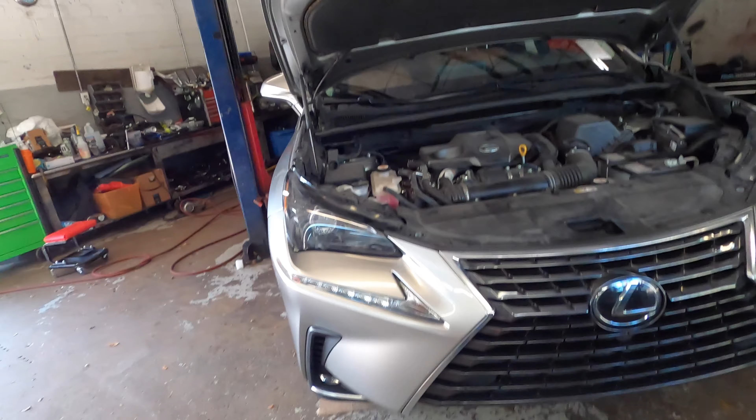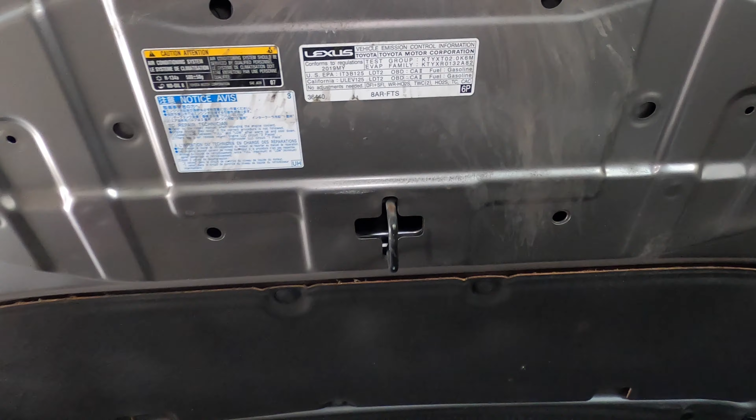So today we're gonna go ahead and change our oil on this Lexus NX 300. Not NXX, it's NX 300. So if your Lexus looks like this, it's gonna be the same procedure if you come with the 2.0 liter engine. Even if it's not the NX, I think the IS 300 comes with it. The one that comes with the 2.0 is the same exact engine, same setup. So it's a turbo car, 2.0 turbo.

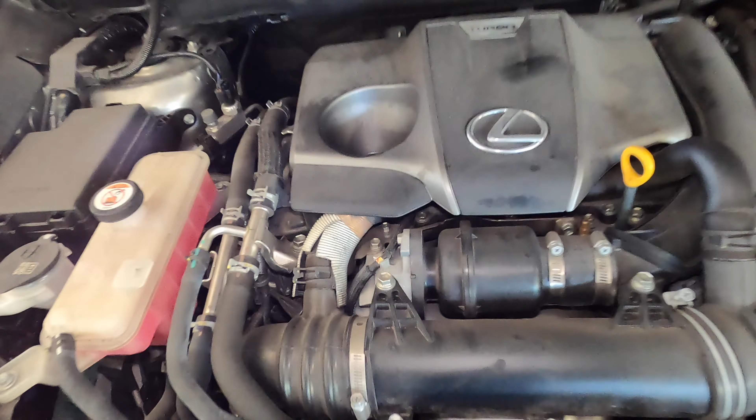So we're going to go ahead and replace the oil and reset the oil light too. So this video will be about that, and let's get started.

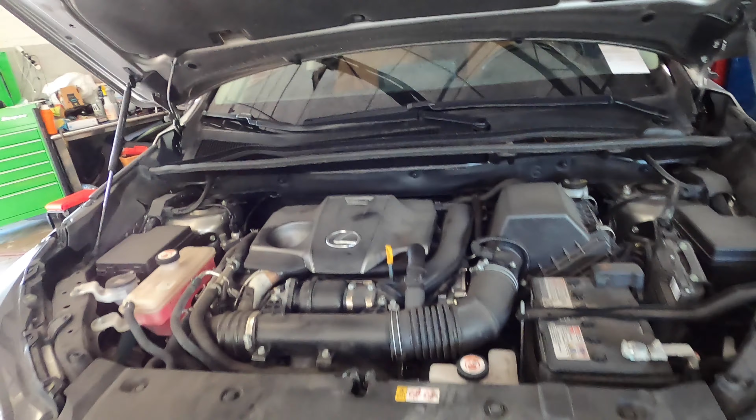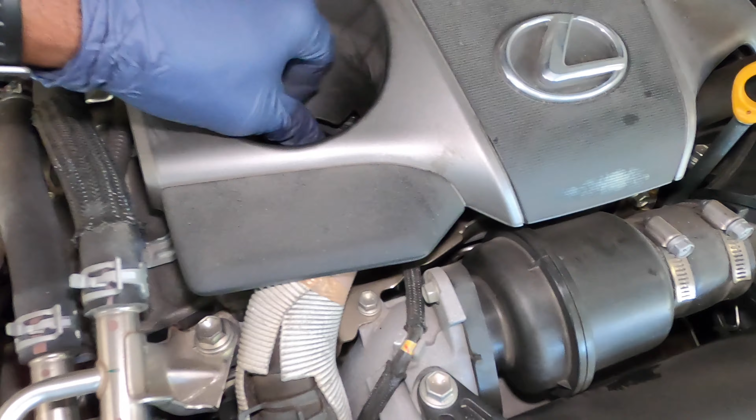So we're going to go ahead and take the cap off. And the reason why we take the cap off is just a personal preference. You don't have to do it. And also you can see it takes 0W20. So I'm gonna leave the cap off. The reason why I take it off is just to have the oil flow out in a steady stream and not all over the place or creating a mess. So that's why I take it off.

That said, we're gonna go ahead and lift up the vehicle and go underneath the vehicle. So guys, now that we're underneath the car, we search for the oil filter. It's going to be right here by your passenger front tire. Your oil filter is right here, and you're going to need a special oil filter tool, the one you use to work on the Toyota.

So if you never knew, Toyota makes Lexus, so it's the same kind of design where the oil filter comes in. And this is the drain plug right here. So I'm gonna go get something to catch the oil and get a special socket for the oil filter.

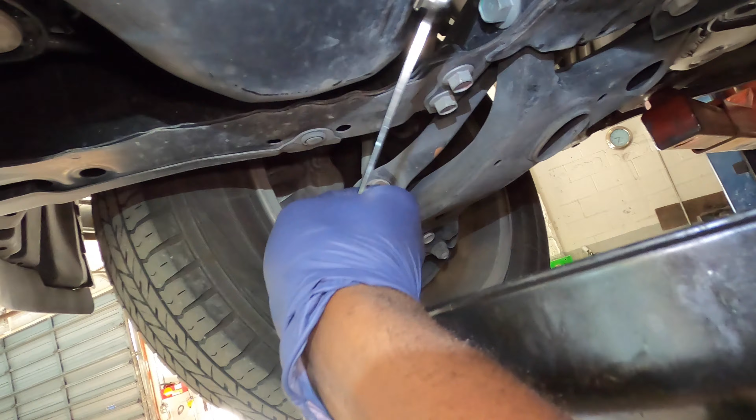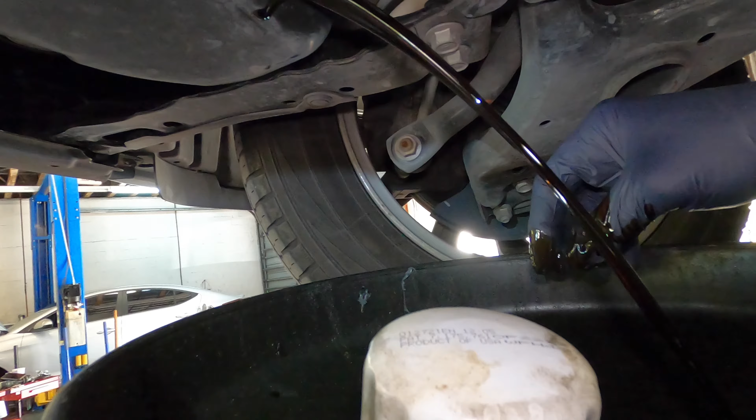So guys, this is 14mm to take this loose, and you're gonna see the reason why I take the cap off. You see how it just flows out steady? Because if you don't do that, it's gonna be gasping for air and it's gonna go back and forth, and it might just go over this, because this is not that big of an opening.

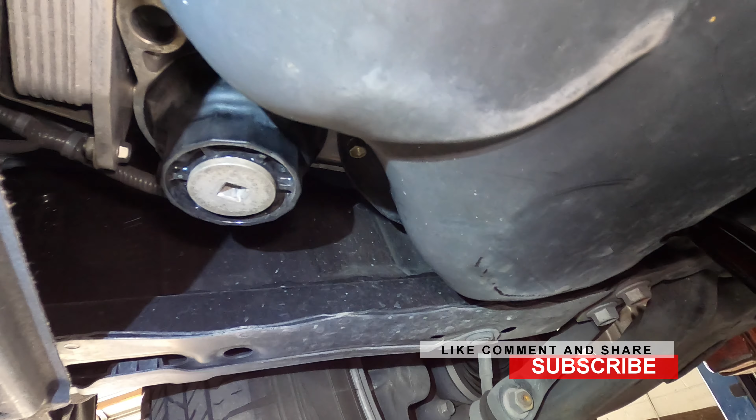So we're gonna let that drain some, and then we're gonna reach around here and just unscrew the oil filter. You can use this little part down here to drain it first, but I'm not gonna drain it. I'm just gonna take it out.

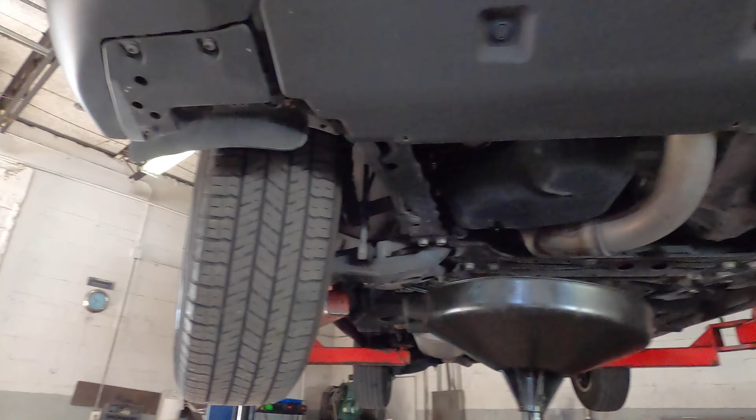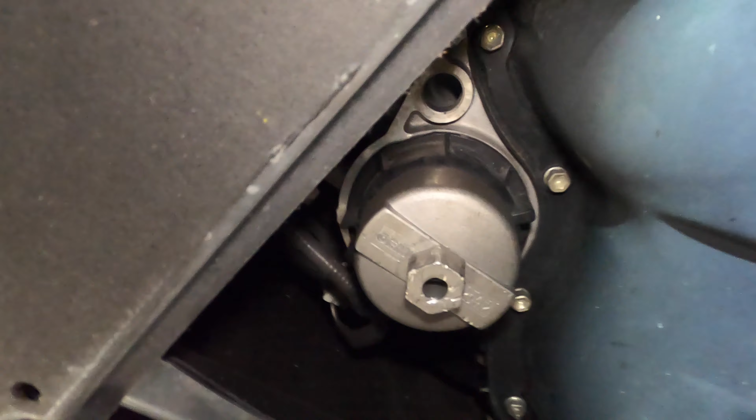So guys, this is the oil filter tool for the Lexus and Toyotas. And that's how it goes. It fits right onto that. And then just gonna use a 22mm to turn it. So that's how we're gonna do it, guys. Alright,

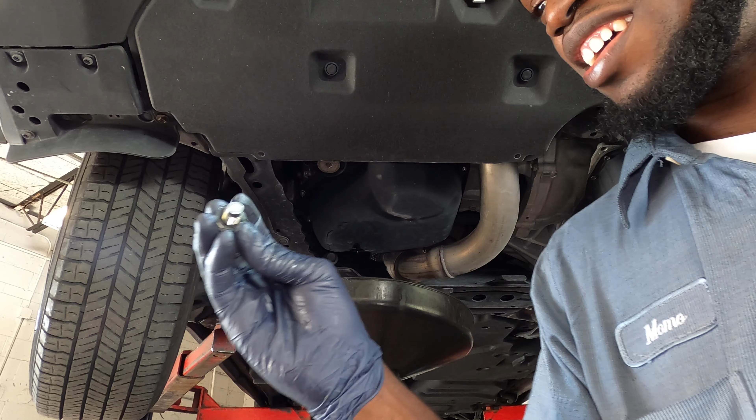and you want to check your washer around your drain plug to make sure it's good. If it's good, you can reuse it, and then you can just order another one for the next oil change. So when you're ordering your oil filter, even now you can just order it and you'll be okay.

This, you just snug it up, you don't have to tighten it, because you don't want to over tighten it. And then we want to have this under here to catch the oil.

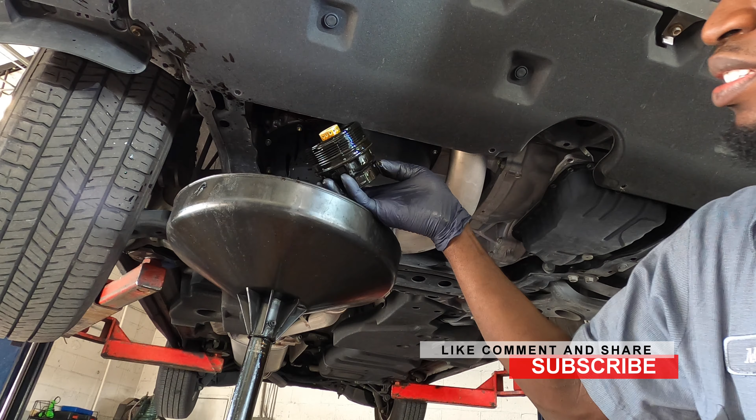So I guess it falls on, but yeah, that's why I have that on the ground to catch the mess. So this, we're gonna clean it and we're gonna replace the O-ring. So I'm gonna go clean it and then get back to you guys.

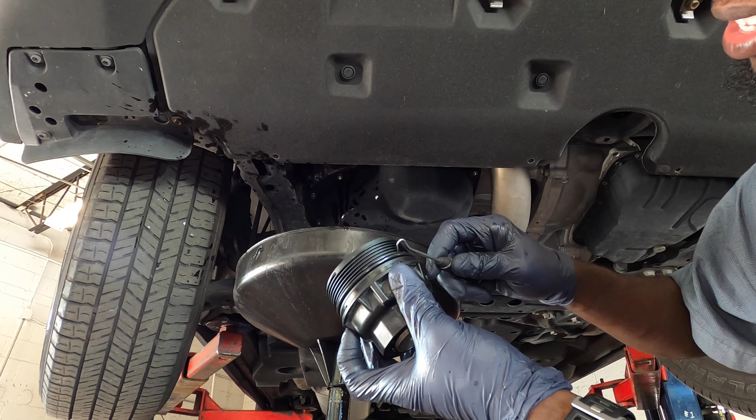Alright, so guys, we just gotta get a hook out this O-ring right here. We're gonna get the new O-ring, which is gonna be in this bag. We're gonna go ahead and install this right here. And also we gotta take this out, and there's another O-ring down there we gotta install.

Alright, so we have our filter, guys. We're gonna install it. And make sure you lube the rubber. I lubed mine, I just forgot to show it on camera, but yeah, it's lubed up.

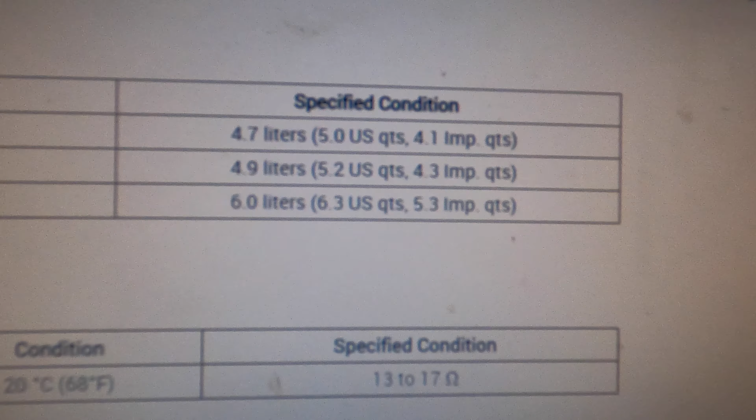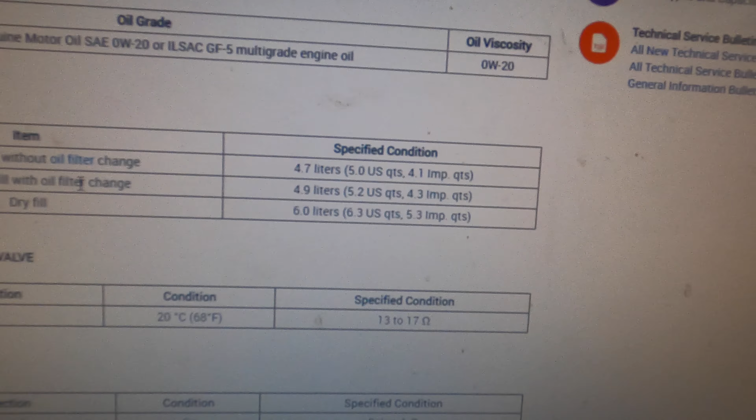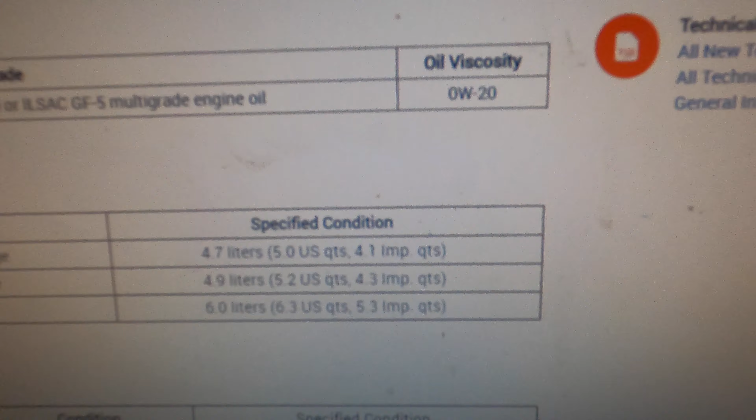So guys, right here, if you're draining the oil without the filter, it's gonna be 5 quart. And if you're draining the oil and refill with the filter, so you do an oil change. So guys, if you're draining and refilling without changing the oil filter, it's gonna be 5 quart. If you're draining and refilling with oil filter, changing the oil filter like what we just did. We just changed the oil.

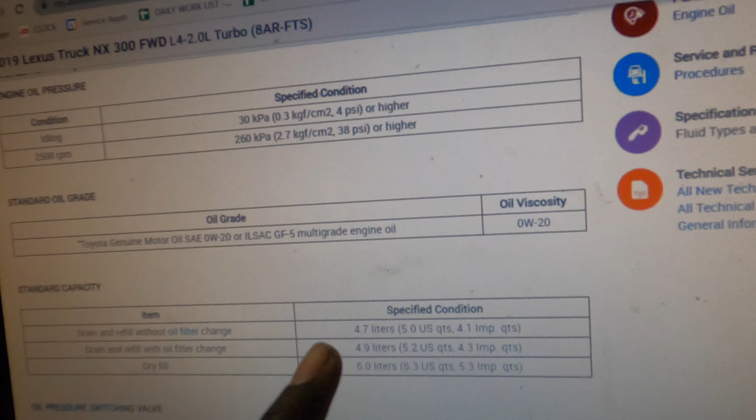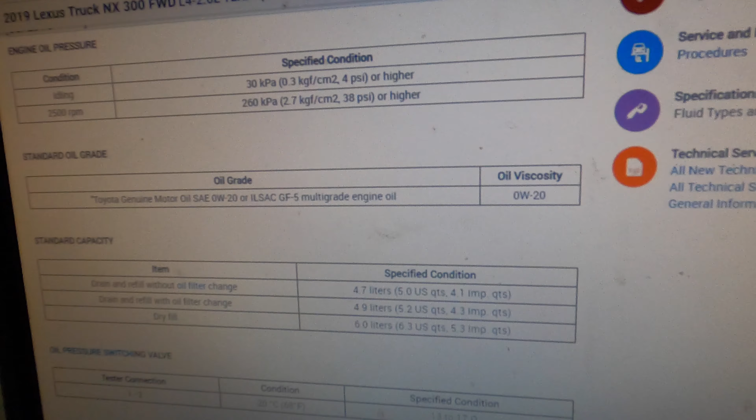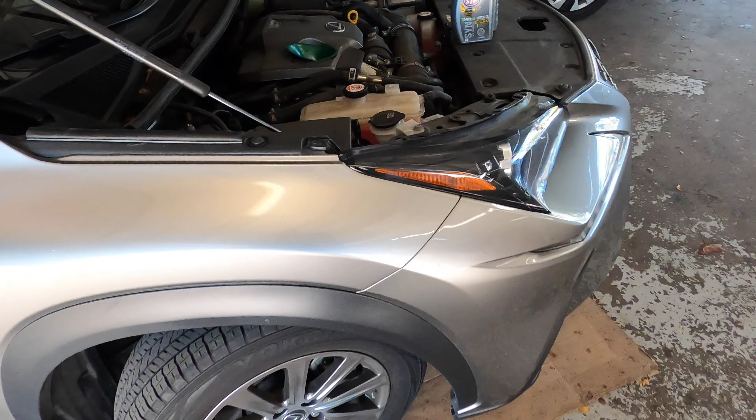So oil change consists of oil and filter, and it's gonna be 5.2 quart. And if you dry fill the engine, it's gonna be 6.3 quart. So that's why you gotta do it right there. So yeah, I'm just gonna add the oil. I have a funnel right here so I don't make any mess, and then we're gonna add some oil.

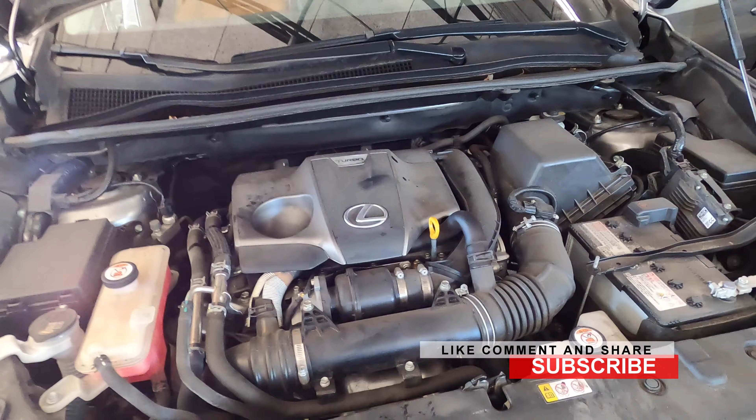So guys, I put 5 quart. Once I put 5 quart in it, it's full all the way up. So I'm going to go ahead and start the car so the oil can circulate throughout the engine. And so we're going to make sure the oil circulates throughout the engine. So now is a good time to start the car, let it warm up.

So now we're gonna reset the oil light, and this is the button you're gonna use. So what you want to do, come all the way over to the right, and then you want to press down. You want to press down till it goes down to vehicle setting, and push this one right here. Then you want to come down to oil maintenance and push that right there again. Then you want to press up to reset data, and just like that, the oil data has been reset.

So we're gonna let the car run for a little bit. Now we're gonna turn the car off, and then we're gonna let the car sit for like 2 minutes. Let the car sit for 2 minutes so the oil can drain down. Then we can recheck the oil. If it needs more, you add it. If you don't need any, you leave it just like that.